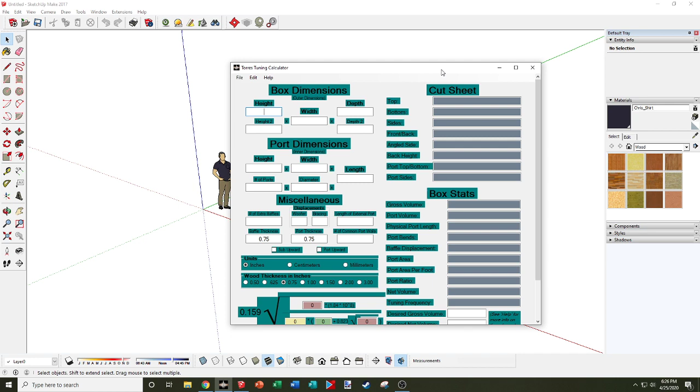It's a Saturday afternoon. We're all in quarantine, I'm sure. Well, I don't know about all of us, but we have a soft quarantine where I'm at. So it's not like we can't go around, but this is the first time I've tried live streaming off my desktop screen. So I'm going to try to do my best here to act like I know what I'm doing, but of course it's our first time.

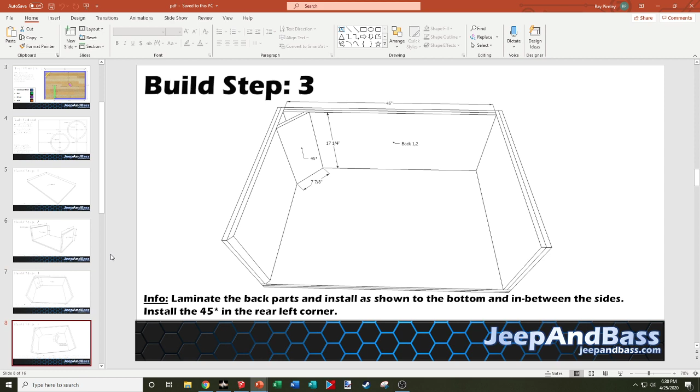and I don't know of anyone else who does that and provides that in their enclosure design services, but step it through and be like, okay, you do this and then this, and I also include sizes, and then there's a cut sheet, for as many as you need, and that's all laid out on here, and then of course I thank you for your order at the end.

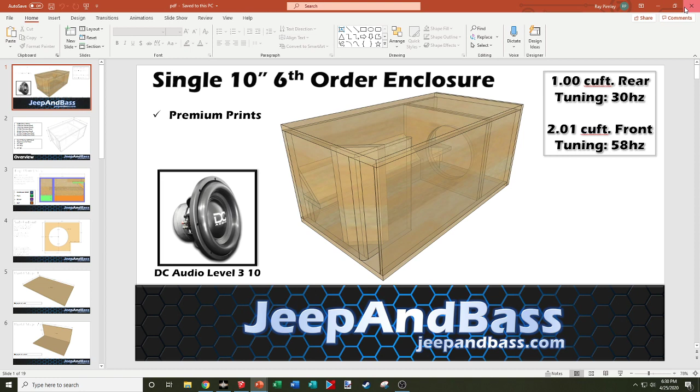And trying to get projects done at the house and all that. But so that's something that you could get as an end product of kind of what I work with here. I primarily stick with ported enclosures because I'm very familiar with them and I've played with them a lot, and I don't use any fancy software.

I'm using this Torres tuning calculator. I've been using this for years, and I find it to be pretty dang accurate for everything I've done. I don't have a download link, but I could get that included later on. Or if you guys Googled it, I'm sure you could find it. But it's a nice little piece of software. It's free. And the next thing I like to use is Trimble SketchUp.

So it's a 3D modeling software. It's also free if you can find that version online. It's kind of tricky. They made it a little harder to find these bits of software, I found, but eventually if you do enough searching you'll end up coming across it and you can get the download, and it works on Windows and everything. So yeah, between those two bits of software I design pretty much everything that I do, and it works. You guys have seen it work.

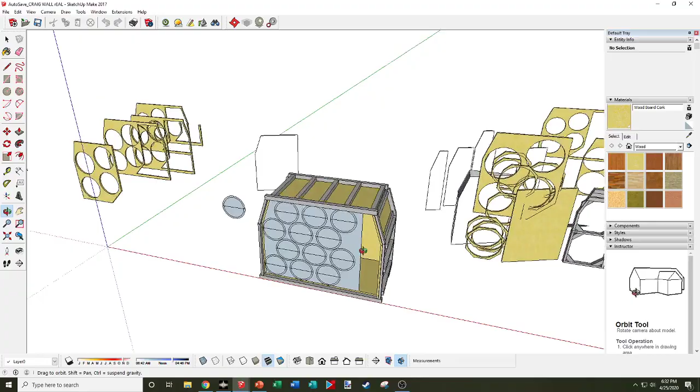So Craig Jacobson wants a wall for 12s. Well, you're just in luck, because that is what I'm doing. So you guys should be excited because the Astrovan is going through changes, and Craig is here watching with us. But this is the model that I put together, and it's very messy right now because we do lots of testing. This is for the Astrovan. This is the 18s build, and this is how I have it modeled. So this is basically the steel cage and enclosure.

And we went through last season really struggling with equipment failure and just the learning curve of building such a high-end SPL system. And with all the things happening in the world and the changes DB Drag, the competition organization, are making, we decided we're not really as into chasing numbers as we originally wanted to be. We got it up to 168s. It's pretty loud, but we wanted to break a 170, and financially and time-wise, it just didn't want to happen. So we're changing our route to something more fun, I think you guys would probably enjoy more on the channel: an actual demo build.

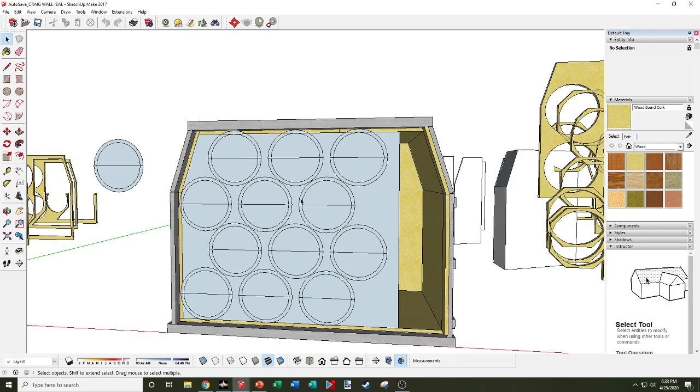So this is something I'm putting together for Craig, and I got to do a lot of brainstorming on making this work, but what we're looking at is our enclosure for the 18s being converted into 12s. So that's kind of a preliminary layout of how I'd put it together. And then these are all our other pieces I was designing for the 18s. And this would be the steel baffle right here that I welded up, and we fit everything to. But that's all going away.

Craig's already been cutting it out, and it's a pain because we, of course, have to cut through metal and everything. But hopefully you guys think that's cool. This is the first time I mentioned it to anyone on YouTube, so congratulations. You saw a sneak peek of what's going to happen throughout the year.

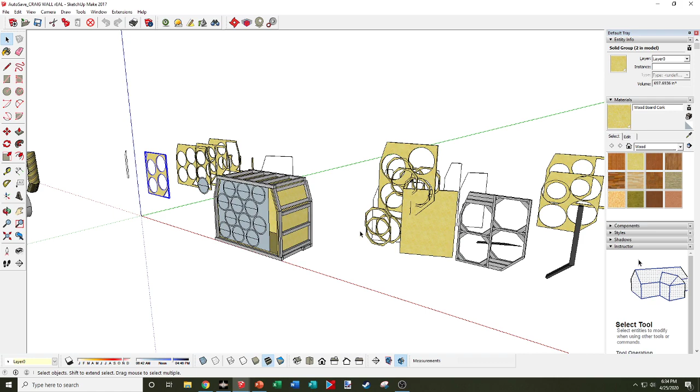But so yeah, this is the software. You can do a lot of stuff with it. A lot of these things, if I'm building this wall, for example, I have access to a CNC machine with Gately Audio. So Bobby Gately in Sacramento, California, he will cut a lot of this stuff for me. So a lot of these baffles we had cut for the van, and what I'll do is I'll design it in Trimble SketchUp, and then I will take all that design, convert it to a two-dimensional design in AutoCAD,

which is software I use for my work and everything. So I have access to Civil 3D and AutoCAD. That software essentially is what the CNC can use to make its cuts and cut our parts out in the real world. So that's that process. But enough of that. Just figured I'd show you guys that. Let's look at something from scratch.

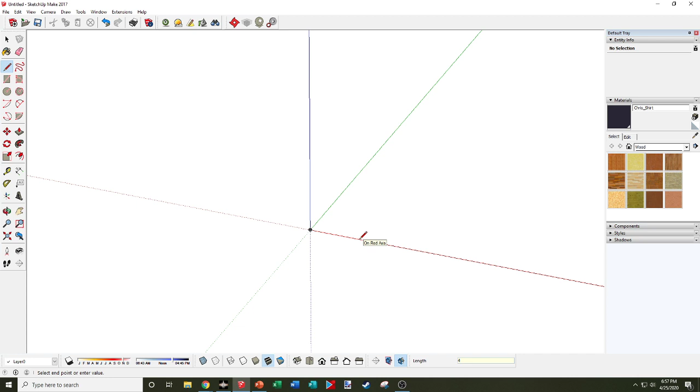Okay. All right. So, you guys probably saw the numbers already, so I'm just going to put it on the other screen and go from there. But I basically start out with the bottom of the enclosure. I know my design is going to be 42 inches wide and 24 inches deep. Okay, so this is my first piece of my bottom of the box, and I'm not going to really give you guys a tutorial on how to use this modeling software. You just follow along, and if you want to play with it, you can download it and learn on your own, but I'll just tell you what I'm doing.

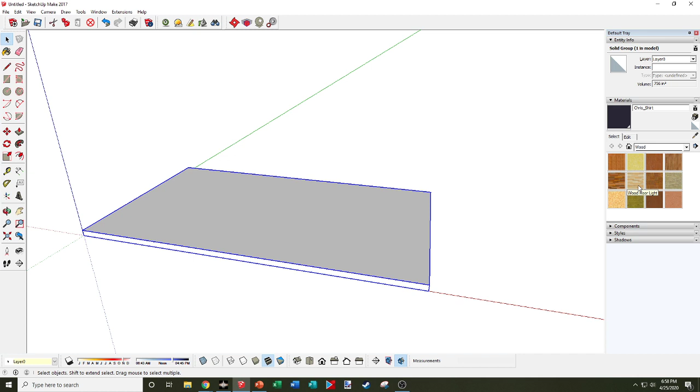So basically I created a 2D surface, and then I made it into a 3D object, and then I'll group it to make a group. So now it's one piece, and the software is not going to get confused and think it's a part of something else. So you can view this as a piece of wood, right? And I can even make it look like a piece of wood. This is my bottom piece of my enclosure, and like I said, I'm going to double up the enclosure to make it 1.5 inches thick all the way around.

So these are my bottom pieces, and if you get a design from me, build step 1 is usually to laminate your two pieces together, usually using your screws and glue. And then we're going to go up from there. So I know my overall height of the box is going to be 20 inches, so I'll draw from the bottom, go up 20 inches, and then I'm going to duplicate these pieces because they'll be the same on the top. And I'm going to place them at the 20-inch mark. So now I got my top and bottom of the box, and now I can draw my sides. So I'm going to do the same thickness, so it'll be 3/4 of an inch.

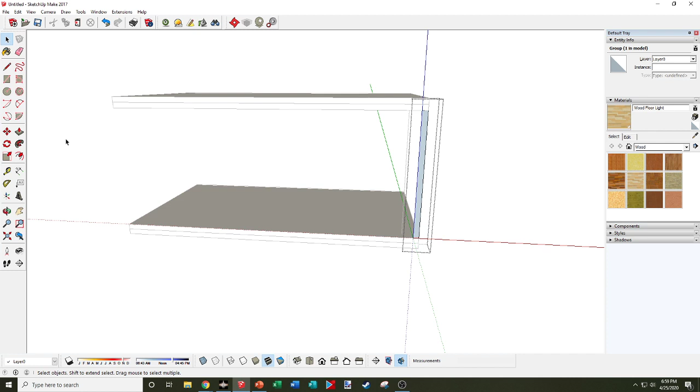And then actually give it some depth here. So there's your side. I'll make it look like wood. And then I can copy it. We're going to copy it so I can double up my side here. And then we'll give it a left side. Alright, so now we have 4 sides to our enclosure, and this is a good start.

At this point, usually I'll take my top and I'll put it somewhere else for now, so I can kind of look down into the box. We're going to draw the back.

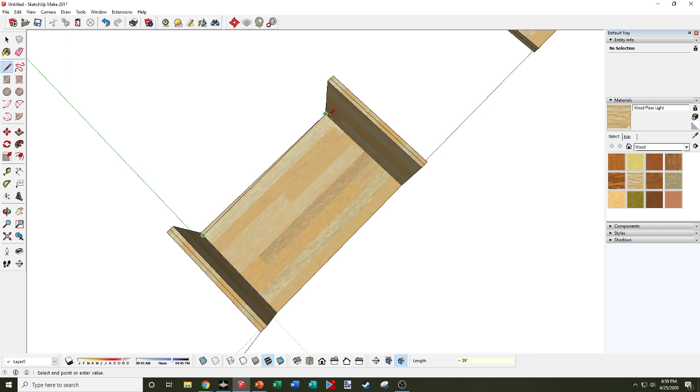And again, guys, I'm not paying attention to your comments at the moment. I'm just kind of going through this quickly so we can get our ideas across, and then towards the end I'll try to get through the comments and hopefully answer what I can.

But so we'll double this up, and there we go. And then I'll just copy these two and make them my front now as well. So there we go. We have all the sides to our enclosure, and right now it's just an empty box, which is fine. And that's kind of what that initial net volume was on Torres when we were looking at it before I added any port or speaker displacement.

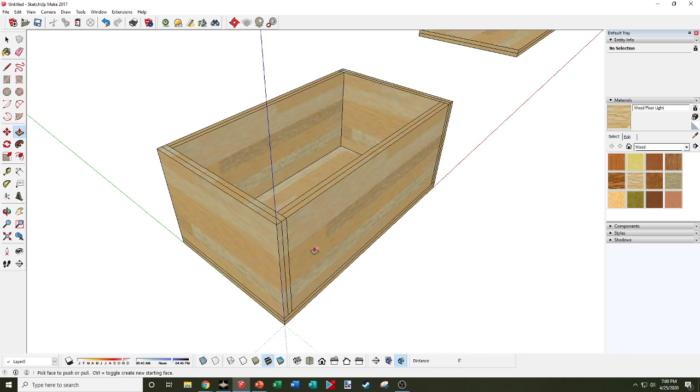So now we got to actually get our port figured out. And if we remember back to here, I said it was 16 inches tall and 5 3/4 wide. So what I mean about how it shares faces with the box was, so this segment is 17. Am I too tall? Oh, I think I forgot something in my design here. So you guys remember I changed the height of my design. I forgot to update the height of my port. So I'm actually going to bring that up and then adjust my width, kind of bring it back.

Let's see. I don't know. That's close enough. So this is kind of that iteration again. If you change your box height and you want your port to be a part of that box height, then you got to change your port height, which means you got to change your port width so that you can get back to that tuning you were going for. So now we're at like a pretty nice rounded off 34 hertz. So we are 17 inches tall and 5.5 wide.

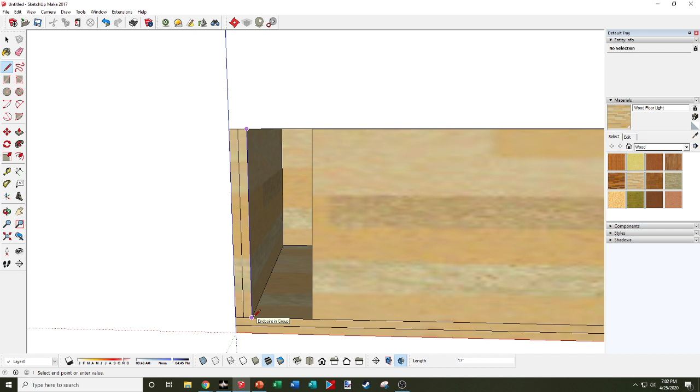And I'll show you really quick visually how that goes. So if I move this 5.5 inches, now you guys can start seeing that's starting to look like a ported enclosure. So this dimension here to the bottom is 17 inches tall. So that's my height of my port, and then obviously my width is 5.5 like I just did. And if we plop our top pieces back on, we have a ported box, sort of, with no depth to the port. But you can see what I was talking about earlier when I was in Torres.

You got to tell it these things, but this number is very important because it's not going to know how to calculate the port without knowing this number. The number of common port walls. I talked about it earlier. That's the number of walls that the port can share with the enclosure. And if you look here, it's 3 because you see this bottom is a part of this port, this side is a part of this port, and this top is a part of the port.

Let's see, if I take this off, you know that obviously the fourth side of the port, this right side, is going to be a piece that kind of sticks into the box. That is not a part of the sides of the box, so it can't be counted as a shared piece of the port in the box. If you were to put the port out in the middle, just like cut a hole out of the middle of the box, then it technically shares no sides.

So then you would make that number 0, and you can see it drastically changes the tuning by like over 2 hertz because now it's basically saying, okay, if I have a port right in the middle, I can't share the sides of the box, which means I have to create 4 sides of a port. If I create 4 sides of a port, I'm actually making more displacement in my box because that's more wood I have to put in the box to actually build a port.

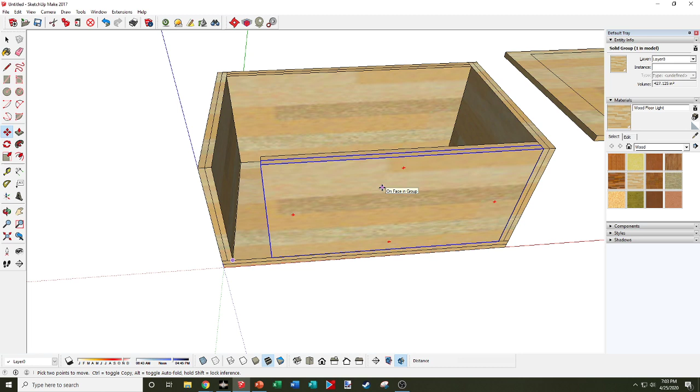So these side ports are really the most efficient use of space, aside from aero ports, because the aero ports aren't going to use a lot of material because they're round and their thickness doesn't take up so much room. So you have to account for the actual pieces of wood. So let's draw this in so you guys get the better visual.

So I'm going to draw the port, and I'm pretty sure it will end up being an L port. So I usually just draw an L, and I start with the first piece as the piece that heads back. And I made sure that this port width going across the outside, this 5.5 inches, is maintained throughout the L. So this section will also be 5.5 inches. So that's why I set it back from the rear of the box. And we'll go ahead and make that a group.

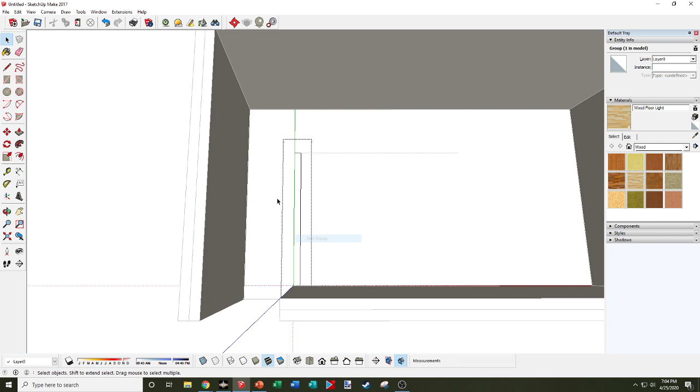And what I like to do is, I know that since this is the L port, I have to turn this corner here. But if you measure this distance near this corner, down here, if you see my cursor circling, that is a dimension that it's measuring out. So if I draw this line, it's going to tell me. Right now it's telling me that's 7 3/4 inches. So that port technically gets wider right here, and that's not what we want.

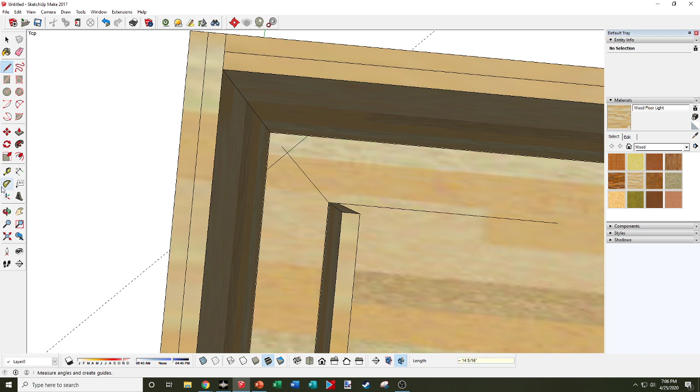So what I like to do is I put a 45 in the box so that the port maintains a pretty consistent width and helps it roll around this corner. So I draw my line into the corner at 5.5 inches long. And I have this fancy tool that lets me rotate things 90 degrees, and then that sets up my 45. So now I know where my 45 is, and I can continue drawing that as a real piece of wood. So I'm going to give it some more dimensions.

Alright, so there's a 45 in our box, and I'm going to make it three-dimensional. Just drag it up here, clean it up. Alright, so now we have a 45 in our corner of our enclosure. So that's pretty sweet. So now I want to use what I have here and find out how much port length I actually have and how much I need to add on, because since I'm doing this L port, I know the port is going to have to go some depth into the box this direction.

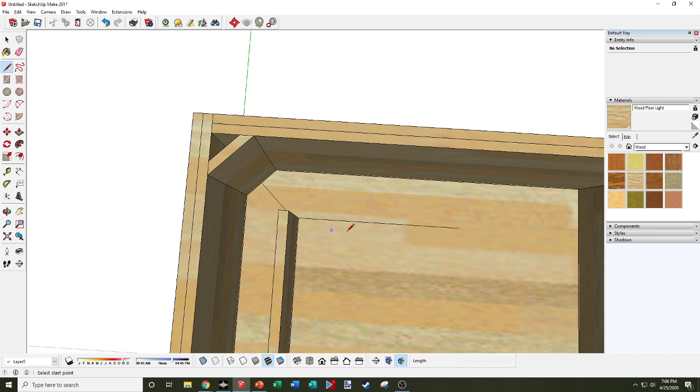So what I do is I'll measure a line down the center of the port, and that's how I determine my port length. And in this 45, I'll shoot some perpendicular lines off, and then I'll draw this line into those. And then down here, I don't know how long this is going to be yet, but I'm going to draw a line and get myself started. And if we clean this up, we now have a path.

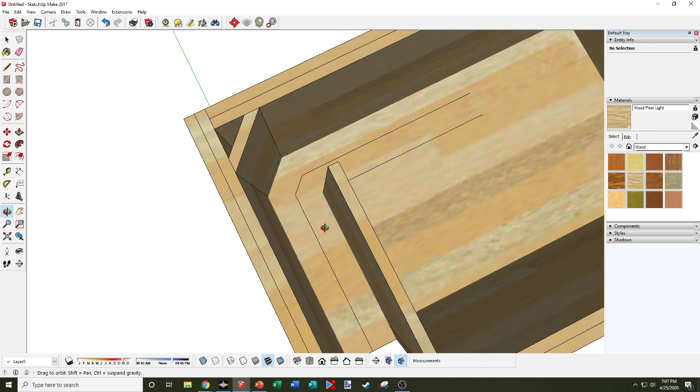You see this line in the center is a path of my port, and I'm going to consider that my port length. If you run down perfectly the middle, you have a pretty average length as you roll through this turn. Geometry gets complicated if you want to go in depth. That's something that you'll have to play with on your own, but generally if you go down the center line of the port, that is the preferred way to measure the port length, in my opinion, and it always turns out good that way. So let's start with this.

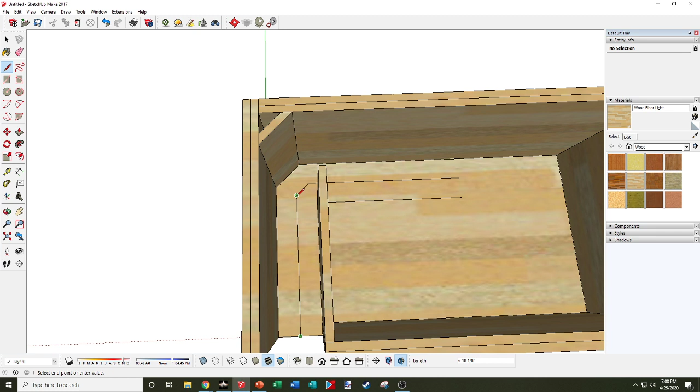Remember guys, looking at this area down here on the screen where my cursor circles, it'll show you the length so you guys can follow along. But I'm going to measure this first segment, and I have a calculator that you guys can't see, so I'm going to do this on my end. But that number is 18 inches plus 1/8 inch. And then I'm going to measure this little segment, and it's 2 1/4 inches. So between those two segments, my port is already going to be just over 20 inches long to this point.

I know I need 26, so from here I take on my calculator 26 less the length I already have measured. It says I need 5.625 inches left to create my full length 26-inch port. So if you draw that line, it finds it right here. And then I know my little L only needs to be this long.

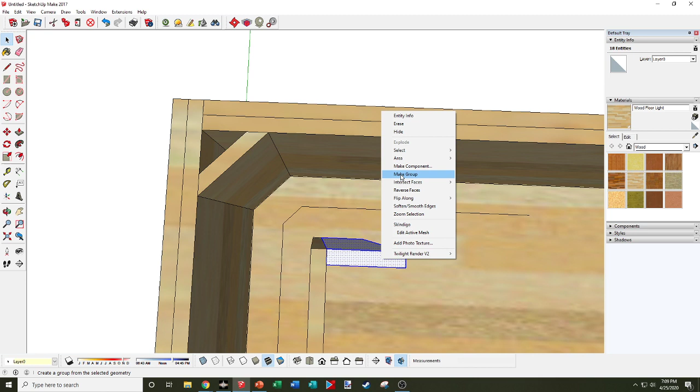Alright. So if I clean this up a little bit for the visual. Alright, so this is my L port, and this line running down the center is now measured at 26 inches long. So now I know that I'm tuned pretty close to accurately, and that could be as far as you guys go into design and feel like it's okay.

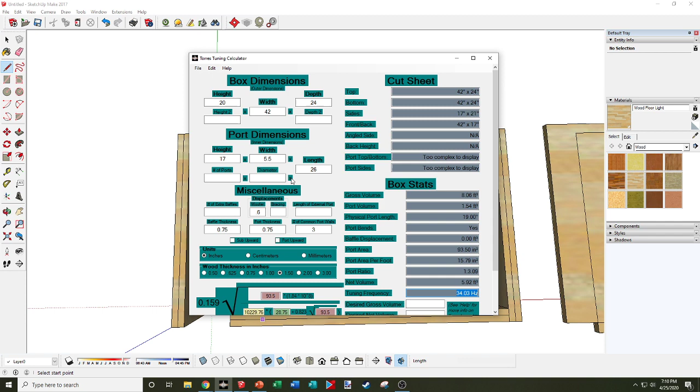That's basically by trusting the software that it exactly calculated this thing correctly. But the nice feature of the software is that you can actually check volumes of things to verify. So what I always like to do is verify what my leftover volume is inside this box, just to double check the software. Torres may have miscalculated. It may have not understood that this was an L port or something was a little off. So what I do is you can draw a line that is the perimeter of the enclosure space on the inside.

So you can see this highlighted area, that's the volume of the enclosure, not of the port. And I like to know how big that is. So you can draw the outline. You'll have this highlighted thing, and you can drag it up a little bit. You have to drag it off the floor of the box, or else it won't understand what you're trying to do. But there's this little label tool here, and you can just click it, and it's going to tell you the square inches of the surface of this.

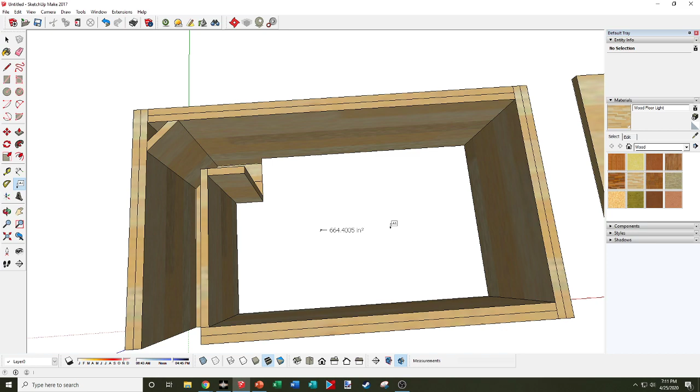You have to raise it off the floor a little bit, as you can see right there, because for some reason it doesn't understand that this piece is separate from this piece, and it'll add in the area of this port, and you don't want to do that. You just want the area of the footprint of the inside of the enclosure. So it's telling me it's 664 square inches. So all I'm going to do is 664.4 times the height of my enclosure on the inside, from my floor up to the top, which is 17 inches. Remember we're talking about the internal volume, so you want to stick with the internal dimensions.

So if you times that by 17, you're going to get a pretty large number, and that's going to be cubic inches. You're going to want to convert cubic inches into cubic feet. So if you take your resulting number and divide it by 1728, you'll have a volume of 6.5 cubic feet. So this entire volume, not including the port, is 6.5 cubic feet. That seems like we're in pretty good shape. But remember, we have to subtract our subwoofers, because they take volume when they go in the box. And I remember we put down 0.6 as our woofer displacement.

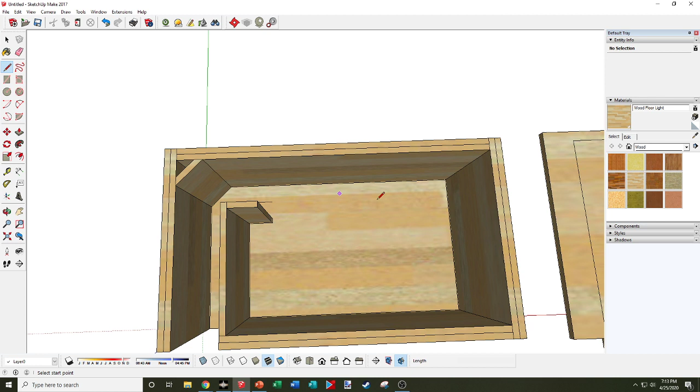So it's going to be 6.53 cubic feet, that's what I just calculated on the software, subtracted by 0.6: 5.93. Wow, we were close. It's 5.92 on Torres. So I think Torres did a good job on this particular design. I've had it in the past where you calculate the volume with the model and it turns out it was a little bit off from Torres, significantly enough that it would impact the tuning of the enclosure.

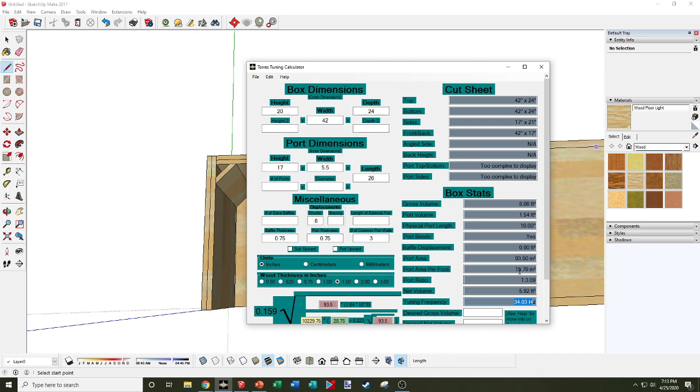From there, I'll leave Torres alone and just pay attention to the goal of the volume and the goal of the tuning and port length. I'll sit here with the model, adjust the walls of the box or change little things, and remeasure the volume of the model to ensure I'm actually matching the volume Torres spit out, because that's the only way you're going to get your tuning, by matching this volume and this port length. So that's how you use the software in tandem. So now we have a nice enclosure, we've verified our subwoofers are going to fit as far as volume goes, and we are tuned correctly.

If you wanted to put a brace in here, that's going to take up volume, so then Torres actually gives you the ability to calculate braces. So if you knew you were putting a brace in, and say the brace took up 0.1 cubic foot, you can type that in for the bracing, and it's going to take that out. And now we see that your tuning's gone up a little bit because you've taken up displacement in the box, and your box volume has gone down, and your port area has gone up, and we're at 16.

So that brace might be okay to put in there, but I might not want it in there because I like the numbers here. It's kind of a lot of trial and error, and you'll play with it.

I'll get some water here.

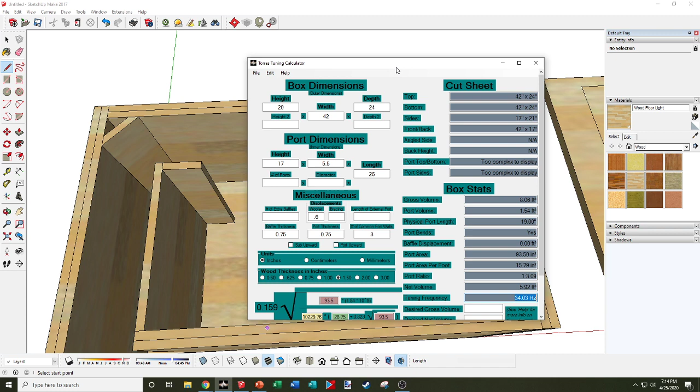Okay. But I'm going to leave this the way it is for this example to keep it simple. This won't be my final product for my Jeep, but it's helping get the point across and do some brainstorming. So we'll put the tops back on, and there we go. We have the enclosure. It's tuned, but now we have to place our speakers. So this will be the next thing I do.

Basically, with this software, I'll just draw a line that's the diameter of the inside of the speaker, so that's the mounting hole diameter, and the outside diameter. And you guys can look up specs on your subwoofer. Usually they'll be provided on the website, but they'll say mounting hole diameter, and for a 12 it's usually 11 inches, and then the outside diameter is 12.5.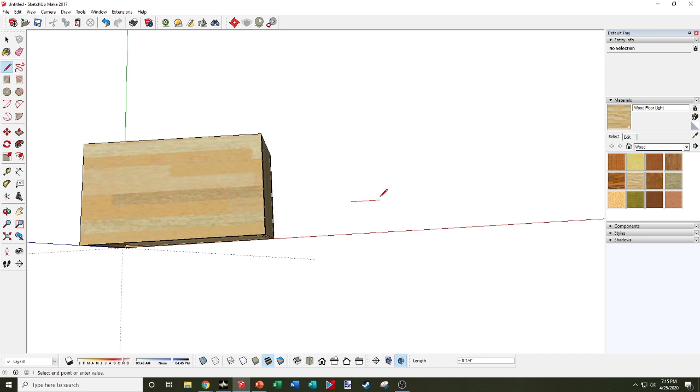So as we all know, the speakers have this flange on them where you put the screws. The cutout of the box is going to be a little smaller, and then the overall is going to be a little bigger, because that flange is going to be larger diameter. So I'll start by drawing one circle. So I'm going to make this line at 11 inches, and then I have a circle.

So that's an 11-inch diameter circle, and then I'll have a 12.5-inch diameter circle over here, and then I just bring them together. And this to me represents my speaker. I'll make it a group. So this is my speaker, and I'm going to plop it on there, and I'm going to make two more because I'll have three speakers.

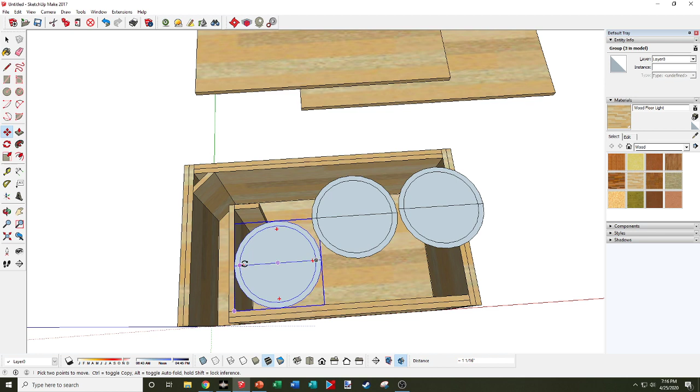And sometimes you'll find out that you physically can't fit your speakers in the way that you have your port set up. So sometimes you have to scrap your design and start over, but I think I can make this work. So I'm going to start by sticking my speakers in a triangle shape. I think that's what I'll end up doing. So they'll kind of go something like that, right?

And maybe you don't like the look of this, then you can change the port. Maybe the port can go across the bottom this time, and then you could center the speakers more in the box overall. So many different ways to do that. And the more you play with it, the better you'll get. So this is why I do these designs sometimes, because people don't want to think about this stuff, or they're not comfortable, and they'll leave it to me. And I'm used to doing this stuff, so I usually figure out a pretty good solution.

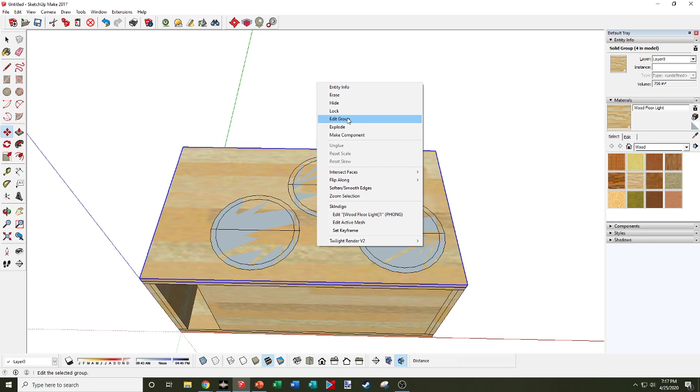So I'm gonna just go with that layout. I didn't perfectly measure where they go, but just for the tutorial, we'll say that they're perfectly placed. So now I'm gonna edit my piece of wood on the top and actually transfer my layout down into it. And again, you're gonna have to learn how to play with the software to do this. And then I can get rid of my little speaker things. And there we go, we got our first set of cutouts.

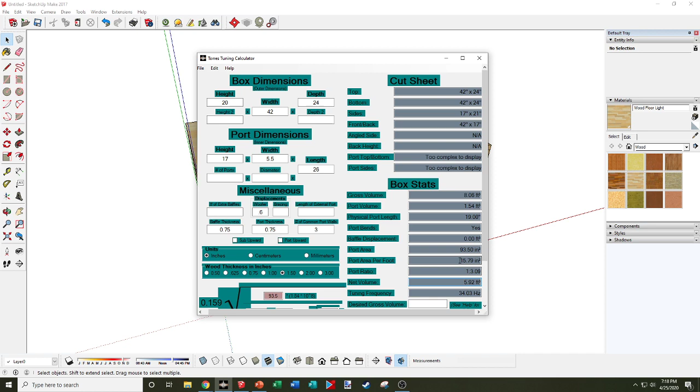And then I can actually just copy that down. That's my double layer baffle. So boom. There we go. And now we have our holes cut out in the model, and it looks awesome. So this is our design right here. And we've already checked that everything works with Torres, so we know that our tuning is going to be at 34 Hertz. We have the appropriate amount of volume, and our port is doing what it's supposed to. And that's essentially the design at that point. There's other things I'll end up doing usually, so we'll go a little more detail.

But you know, this will get you going. Things I'd like to do, because I'm funny, and this will take up volume. So in my example, I might not be able to get away with as much of these kind of cosmetic things, but we'll have to keep account of the volumes that are being used.

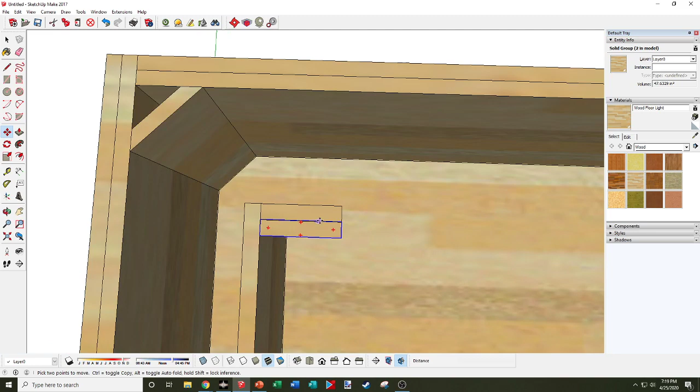But I'm going to actually double this up right here on this L. That's what I like to do for most people's builds, because I like to put a nice round over on the end of these. Sometimes the software doesn't know what you're trying to do, so you have to kind of help it out. But this is if you took your router and you put a round over on it. So there you go, you have a round over.

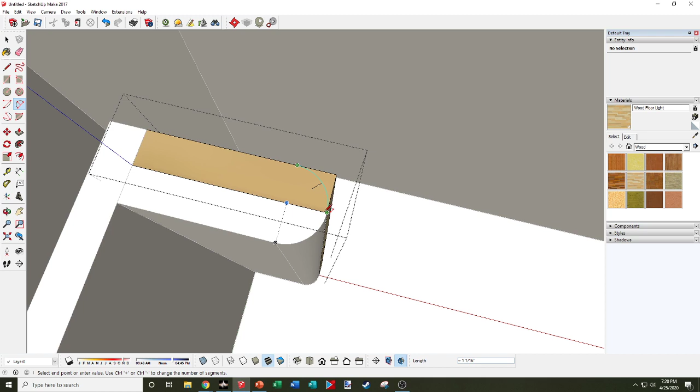And then I would do the same thing on this side. Right. I don't think I drew it right. Sometimes you have to help software, so you have to draw a line out and then it knows what to connect to. There. Alright, so that would be the end of your port. It's a nice clean round over, that way air is getting around it nicely, and then maybe you'd put one on the inside of this to kind of clean it up. So I'll do one of those.

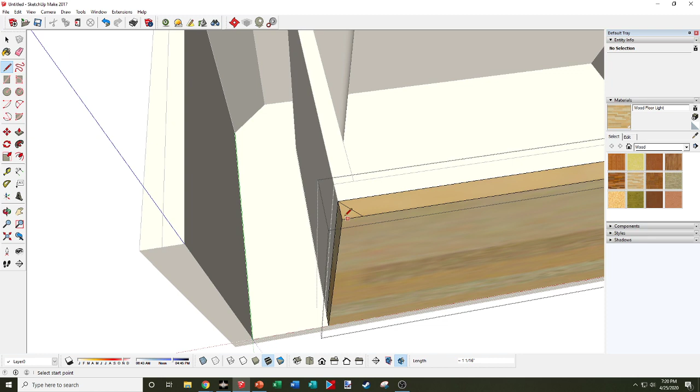And there you go. You got a nice smooth flowing port going through there, and then maybe on the front you want to do a round over, or maybe you want to do like a 45. 45s are usually okay. Something cosmetic, or however you like your box to look. I like the look of these 45s cut in here. So then you could do that.

So there would be your port opening, and now you can put your box back together, and you can call it a done design. And then I would usually double check all my work, and then I would put together the plans for someone and send it off to them in a PDF. You can do this cool thing with shadows and make it look nice for a cosmetic photo or something to send to someone or to look at.

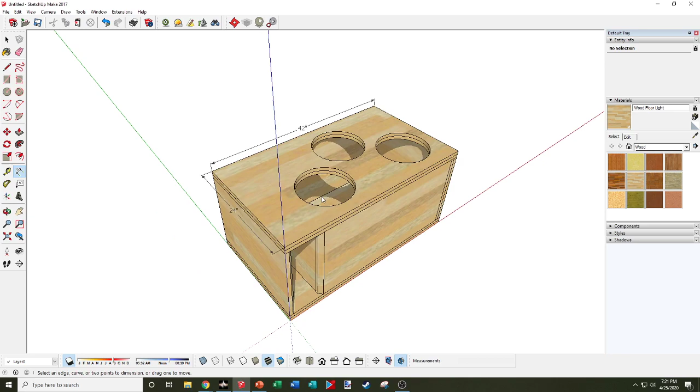But there would be your box, and then you can look at the measurements and see how big it is by measuring this stuff out. So that would be your speaker enclosure, and we just designed that in probably an hour. I'm a little faster when I'm able to think and not have to speak. And it works out and it matches this. And people are going to be like, well, I want to see a graph, or how's this thing going to perform?

And that's a lot of the stuff that comes with experience. Honestly, I don't trust any of those softwares like BassBox Pro to tell you a bandwidth. It's not ever going to be accurate to the real world. For me, it's been trial and error for a lot of years, and just knowing this is my goal in my head. I realize that a ported enclosure is not going to have crazy bandwidth the same as a sixth order or maybe a fourth order. It's going to act different, but I understand that. I understand what I want.

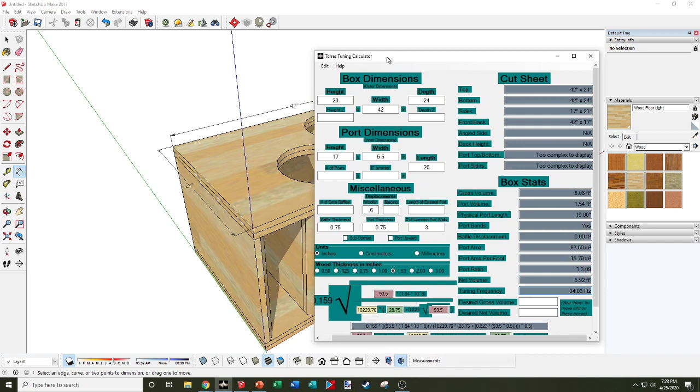I want it to be pretty loud. I don't need super crazy lows, so I'm not worried about tuning it into the dirt. I'll tune it at 34 hertz, and it will play probably safely down to like 25 to 28 hertz, depending on the vehicle or the subwoofer. The subs that I'm using are the ones out of my old build, and they naturally play stupid low, and they love it. So if I tune this thing at 34 hertz, I know those subs are going to be happy, and they're going to carry down to 25 hertz pretty well, even in this box, and be able to play significantly above that.

Usually the rule of thumb to gauge roughly what your bandwidth should be is the box will play pretty safely about a half octave to an octave lower than your tuning, and it'll play pretty safely an octave or even two above what you've tuned. And an octave, I guess you could say, is like halving this number.

So like 34 divided by 2 would be, that dictates it plays down to 17 hertz, which is way lower than it would. So it's probably about a half octave is realistic. So 34 divided by, let's see, I guess that's 1.5. I'm trying to remember this rule because it seemed pretty realistic, but I think just kind of based on what I know, I think this should definitely play down to about 25 hertz, considering my subs. And if it plays an octave above, that's going to be 34 times 2.

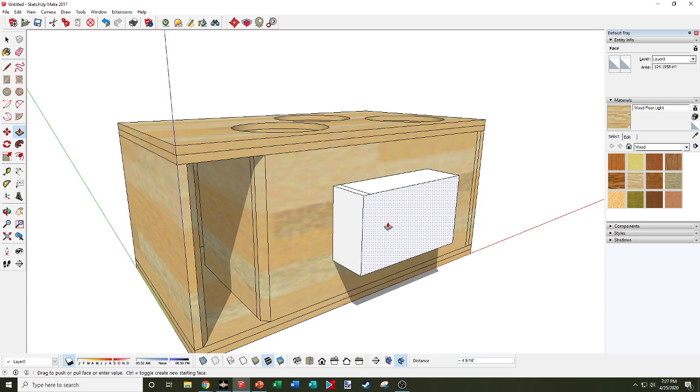So I'll tell it it's going to be 5 inches on the outside. So it'll actually pull the port out. So if you had a port going through your firewall, and then the rest was actually coming into the box, it will know how to take that volume out. But the tricky part is when you're doing that and coupling chambers, you end up having to do a lot more checking of volumes, because that's when Torres will start having issues keeping good track of your volumes the more complex of a design you do.

So a lot of this stuff is you got to do your own bookkeeping and keep track of your design, and purely think of Torres as a way to get you to the ballpark. And if you really want to fine tune stuff, you pay attention to the numbers it's putting out. Like if you want this thing at exactly 37 hertz, you need to figure out how to get your design to be exactly 6.45 cubic foot at this port area with that port length. And it'll all work out in the end, but it does take a lot of patience. So again, people will come to me and just have me do it because I can do that. I'm used to doing that.

So I've been doing more designs lately because I've had time at home and been able to do that. But if you want to try this stuff on your own, then it's a lot of trial and error and practice. But definitely brush up on geometry and some basic math skills. If that's stuff that you don't do every day, those are good things to know. Just understand what volume is, understand what square inch area is, understand how geometry works.

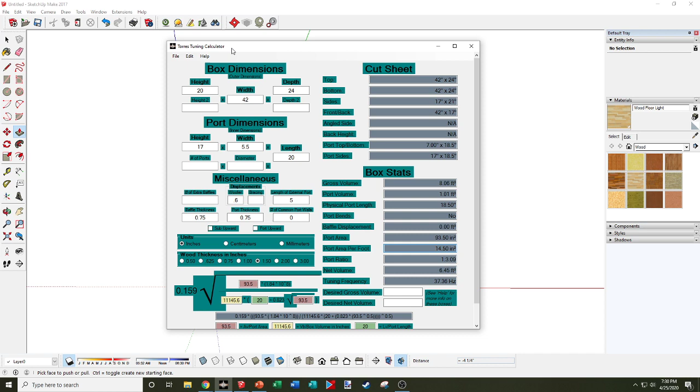I've gotten emails from you guys before from other designers, asking me if I could look at the work and see if there's something I can improve. And I've seen some weird stuff that I don't think I would do, and I never want to bash on other designers, but there's stuff that I don't understand, and it seems like you guys would pay a bunch of money to someone and you don't get a very nice product out of it. They'll give you a cut sheet and some dimensions and call it good, and they send you a couple of pictures.

I'm not into that. I feel like giving you guys the full service is the best way, because not only do you need to know that your box is tuned right or if it's the right size or everything's going to actually fit, but you need to know how to build it, in my opinion. So that's why I do these step by step. I'll show you like, hey, this piece will go on next. It's got to have this cut in it. You probably want to do that cut before you put it on the box, blah, blah, blah.

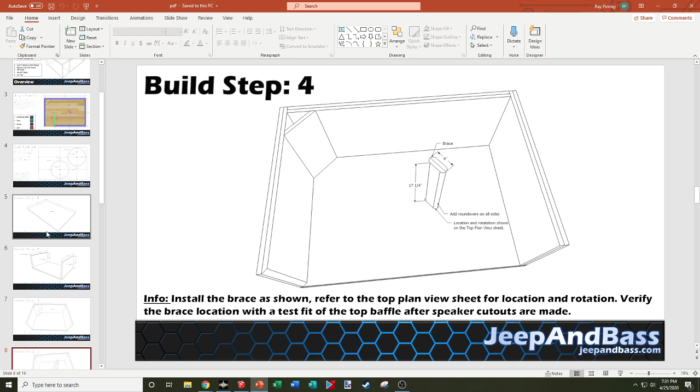For every example, you'll get the detailed specs. And that's what I like to include in my plans. I'll even tell you where this brace goes. I'll tell you all kind of things about it. So you can kind of see that there's the next level of detail that I try to provide to people if they come to me for an enclosure design.

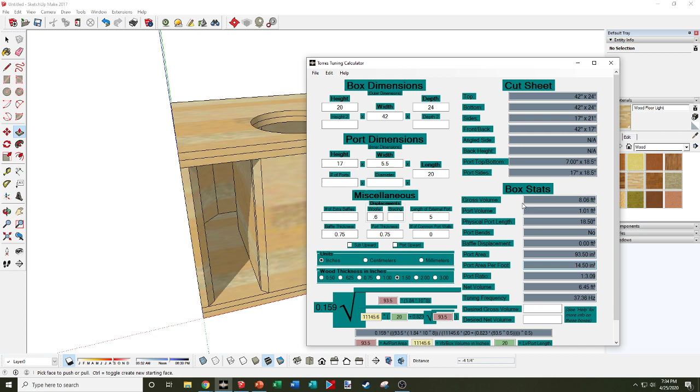So yeah, you can design band passes on here. You just have to do a lot more tracking and footwork with what you're doing on the numbers, because this software will not spit out a fourth order or sixth order for you. It just doesn't. It only knows how to do ported enclosures. So if you're doing band passes, you kind of have to treat it as a ported enclosure and then couple it with another enclosure on your own. But it's something for you guys to play with if you want to do that.

So you guys like the box? Someone says amazing. So yeah, if you guys didn't catch this earlier, this is going to be for my Jeep. I am going back to just a regular, not wall setup. I have a lot of reasons. I can go over that in another video. I don't want to bring people down or make them feel sad. I don't know if I'm moving on from doing that or if I just want to preserve my Jeep. But in the future, we'll be doing more builds on the channel, like big walls.

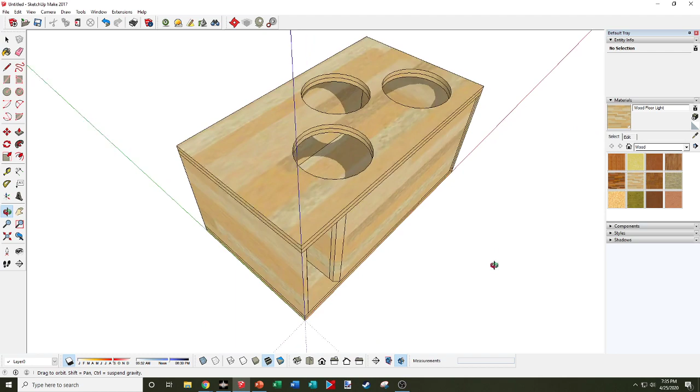I think the Jeep wants to retire for the most part, and trust me, there's going to be a nice build video for the Jeep, and it's going to have an enclosure pretty much like this one. This is my first iteration of a design, and I'll keep playing with it. So it should be fun for me to do a build in the Jeep that is more on the level of what you guys might be doing in your personal builds. Not everyone on my channel is building walls. Not everyone's even doing 312s. There's guys with 112 on one little amp. I'm doing 312s on 15,000 watts, and I'm trying to convince myself that's a small build. I guess it's not, but hopefully it's more in line with what you guys would like to see as a learning experience for your own personal builds.

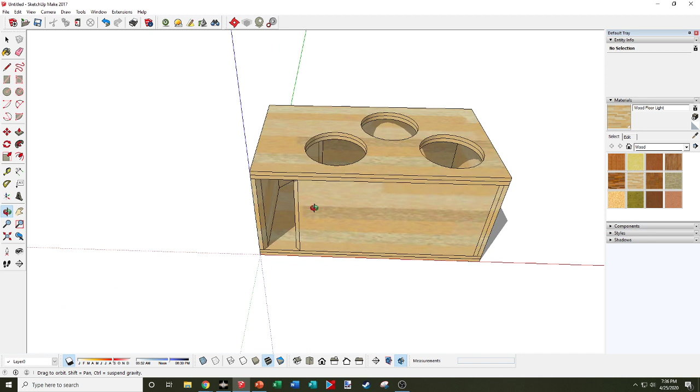So that's kind of where I'm going with the Jeep, and I want to restore the Jeep and have some fun with it again. I used to take it off road and do a lot of fun stuff like camping, and I think that's what I'm going to do with it. And we're gonna rebuild Craig's van a little bit into a demo monster. So there's going to be a huge wall build coming on the channel, so don't worry. But again, I'll post an official video and we'll go over that.

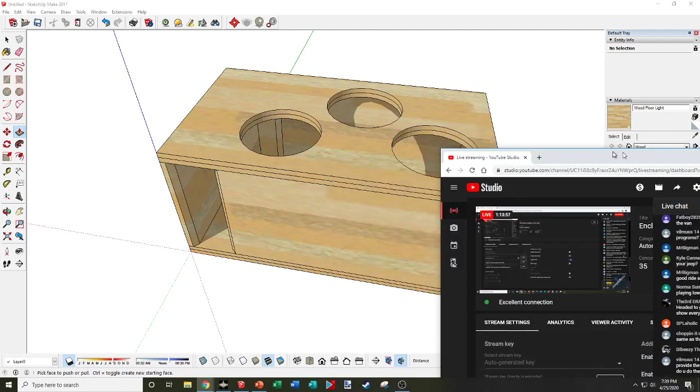And there's some cool videos online. There's this dude in Australia, I forget his name. He's got a YouTube channel. I think he's doing a lot of amp repairs now and stuff. You guys probably follow him. But he had a video showing subwoofer frequency versus port tuning, and how those things interact with each other. And he used this scenario of a weight on a string, and you swing it back

and forth. And he was showing how his hand motions in relation to the string were kind of like the FS of the sub versus the port tuning, and you could get the little weight to swing back and forth at the same rate as your hand, or you could speed up your hand, and then the weight is kind of trying to trail behind your hand. He did all these really great examples, and it really well explains how that all works.

So you guys might know who I'm talking about. Yeah, Bear Vids. Guys, go look him up, there's a video, and it's a really, really way better explanation than I could ever give you on how the port interacts with the subwoofer.

So I want to keep going with the comments. Thanks guys for chiming in on that. "Your port height is wrong now." I know. I was playing with Torres for some other example. I don't know when I changed it. I think it's still right. It doesn't matter because I finished this design and I was playing with Torres for some other questions. So I'm gonna keep going.

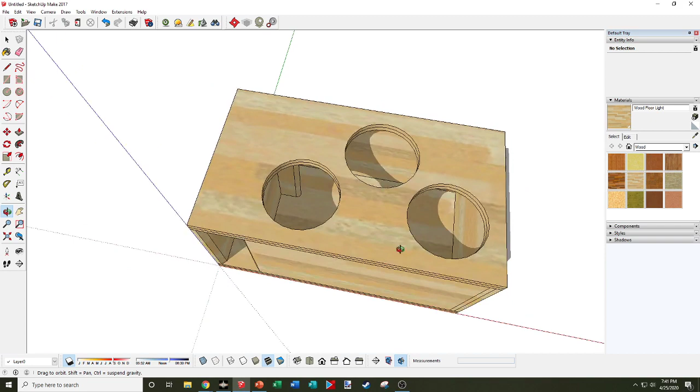"Is this for your new enclosure?" Yeah, I think we answered that. For the new build in the Jeep, I'm doing the JVF 12s for right now, and I'm pretty sure they're not gonna like the amount of power I have to throw at them. So we'll eventually do a Level 5 DC. So yeah, some Level 5s in here. Maybe put them inverted or something. We'll play with it. Something fun for the channel.

We can go over inverted subs versus non-inverted subs, but a good example of that right here on Torres calculator is, you notice I have the subwoofer volume taken out of the box, and we're tuned. If I fix this, I think that's what I just had. Yeah. So say my box is tuned at 34 hertz. Well, if I go ahead and invert my subs, I can take this volume out of the box, and now I'm tuned at 32.4 hertz.

Right, so I effectively made my box bigger. The box is now 6.5 cubic foot, but now my port area is a little small, so it could potentially lose some bandwidth, or it could gain. It's hard to say until you try it, but you could definitely say that the tuning has gone down, which means it could potentially play lower.

So when people invert their subs, that's exactly what's happening. You've created volume in the box, therefore the box is now bigger and will play lower as long as nothing else has changed.

So let's keep going with comments. These are probably older ones because I haven't looked for a while. But center port will use 2 walls, top and bottom. Well, yeah, you guys are catching on. So like this port uses 3 walls.

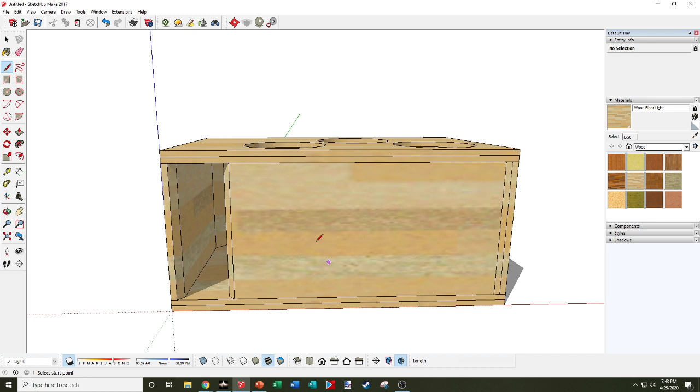If I had a port right in the middle of the box that was from the top to the bottom, then it would only use 2 because it's only using top and bottom. But like I said earlier, if it was like a blow-through style port, then it's using no sides because it's not sharing anything with the box. So that's that. But let's go back.

Oh boy, let's see. Why don't you just raise the cubic inch tool up to 17 inches? Then all you'd have to do is divide the number by 1728. Well, it's because it's not a real cubic inch tool. You guys are gonna have to play with this software, but I'm gonna draw. Let's say I want to know the volume of this little area right here.

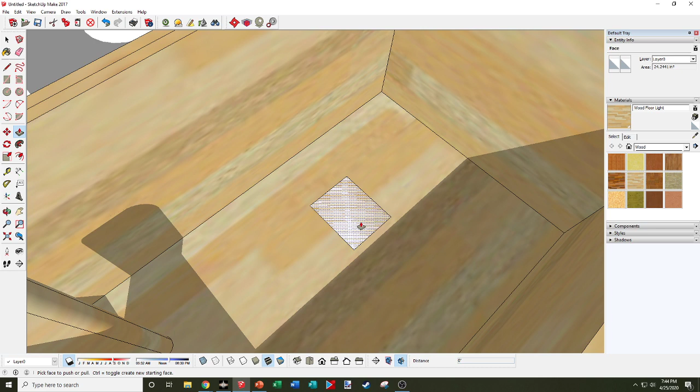I just drew like a 2D face, and it doesn't understand that I'm trying to get the little bitty area of that. So I just drag it up, and then it can get the area of just that top face that isn't this whole bottom of the box. So now it's like a small number, 24 inches. It can't tell me the volume of this square without me manually calculating that based on that little number, because it's only getting the surface area of the top face of the square. It doesn't understand that this is a cube.

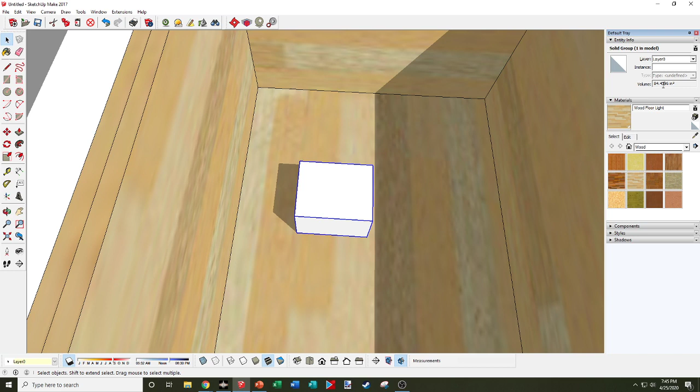The only way the software will understand it's a cube is if you drew a nice cube and you made it a group, then it will tell you up here the volume of that cube in cubic inches. So that's a way to do it. I guess I could do it that way, but that requires that I draw this out perfectly in here and I make it a group. So there's a couple of different ways to go about calculating the area and the volume of a box, right? So you guys will end up having to play with the software if you download it. And I can try to answer questions later on.

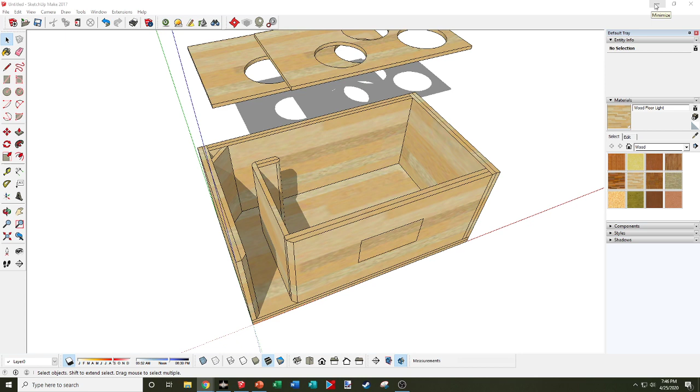But since Craig's doing a big build, we should have the best of both worlds on the channel. And don't worry, I'll end up getting another vehicle in the future that we can do. If you didn't see at the beginning of the live stream, to give you some hope for the world, the Astrovan is being rebuilt a little bit. We're cutting the baffle out, and you guys remember this is my design for the 418s. We are switching this thing out to 1212s, and it's going to be a demo build. So don't worry, guys. There's going to be a big demo wall build on the channel. We'll be having video on that, and I think it'll be a lot more fun than chasing numbers.

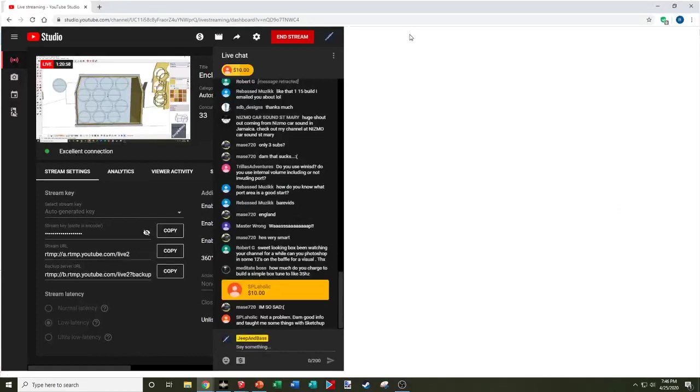That was a tough thing. My goal was breaking a 170, and we broke a 168, but we lost so much equipment, and it was so hard. And the hate online from the community of the dB drag people, and I don't want to compete that much anymore.

I like competing in music classes, and I like competing in MECA and IASCA, but I do not like dB drag anymore, and I don't feel like talking about dB drag. If you guys participate in dB drag, do it for yourself. Don't do it for the title anymore. There's no point, in my opinion.

So Craig and I decided we are switching to a demo build. We're going to put up whatever number it puts up. We hope it does a 165, but actually be musical instead of just a fart box, a burp box, you know, for chasing SPL. The concrete portion of the enclosure obviously is staying. We're not messing with that because that's what that is.

But we're trying to make the Astro van more of like the people's build, and we think that 12s will be awesome, and we can start demoing it for everyone. We're gonna put some crazy door panels in it, and just have tons of mids and highs, and we'll have fun with the vehicle. We have a nice wrap on the van, and we really have fun with the van. But we're gonna do the people's build, I think, with that.

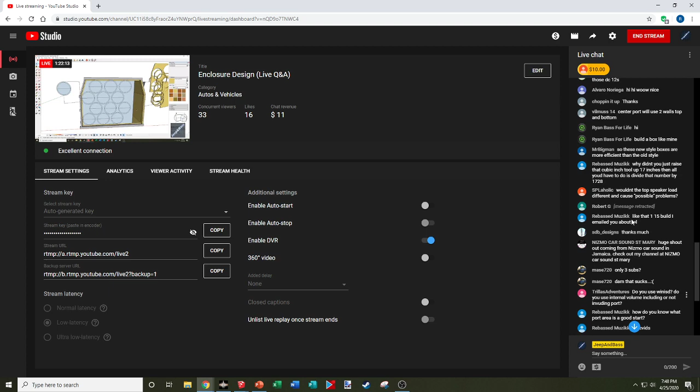So kind of panning back through these questions. Oh man, people in Jamaica. What's up, Jamaica? I hope you're still watching. Thank you, Nizmo Sound. I butchered the name. I'm sorry, but you guys can see in the comments that must be your shop, and hopefully this is a nice shout out for you guys. So if you guys are in Jamaica, there's a shop you can go to.

Alright, so WinISD, do you recommend checking? No, I don't use WinISD. I played with it and I didn't really like it. Again, like BassBox Pro and all those softwares, I don't care what the software tells me what the bandwidth is going to be. You know, they give you the little output in the graph. They want to know all the sub specs. I don't care. Where I'm at in car audio is I have enough background knowledge in my head of what things do.

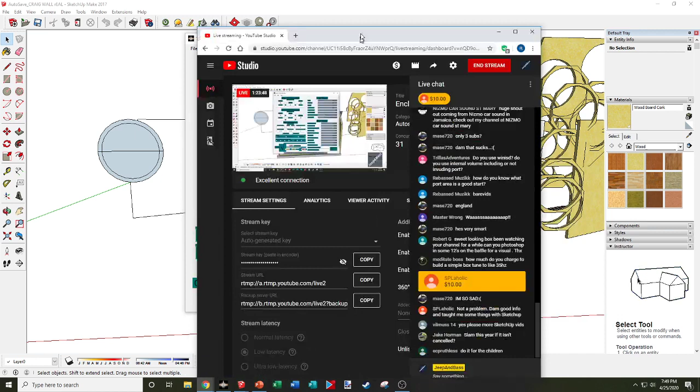So when I set out and I design something on here, I usually think of the vehicle if I know the vehicle. If I don't, then it's kind of a shot in the dark sometimes. But I have a general idea. Like, I know this works in this vehicle. I know that this woofer prefers to do this, and I know how much power I'm going to be using. I'm going to design it based on what I think it's going to do and what my goal is for that design. I don't pay attention to what little graphs are going to tell me because none of that stuff ever works out in the real world. It'll totally change, and I don't mess with it. So anything that outputs the graph, I don't care. That's just where I'm at.

So Robert G says, what's up? Been watching your channel for a while. Can you Photoshop in some 12s in the baffle for visual? Thanks. I could actually Photoshop speakers into these models so you can see them, but it takes time, and so I never usually do. I just show the holes.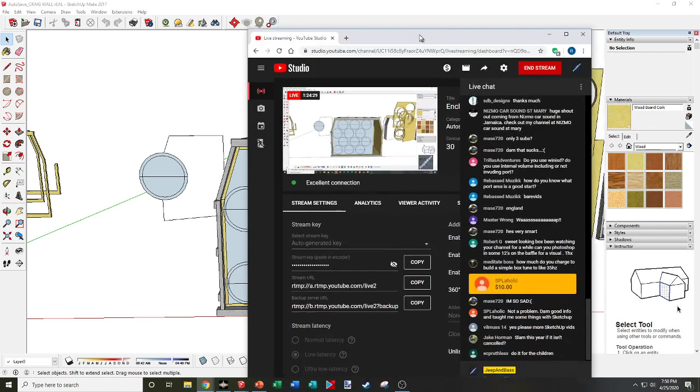If someone specially requested to see the speaker in there, I'd have to charge you for some time because I'd have to actually draw the speaker out. I don't know how hard it would be. I haven't really done that for a long time. I think there's a way you can paste images into the software and you could have the face of the speaker, but I don't ever worry about it. But if you wanted it for a visual, there you go.

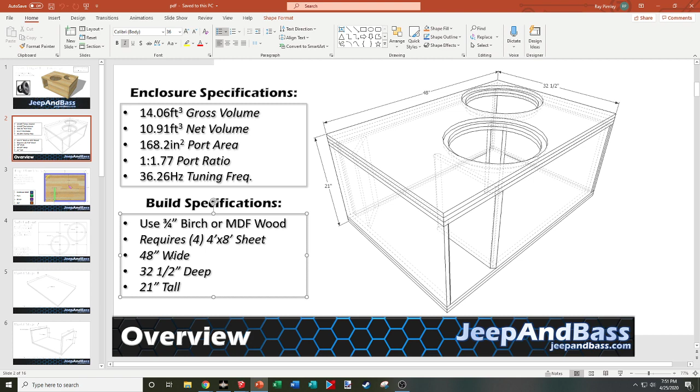You'd be able to say that to people, you know. So that's something I provide, and it seems like 40 is a good value. I've had a lot of people tell me I need to charge more, and I don't know. I charge a lot more when it comes to doing bandpass enclosures, and I usually tell people I don't want to mess with bandpass enclosures because it takes so much more of my time. I'll send it off to someone like SPLaholic or whoever, and there's some good designers out there that do those a lot more. But so yeah, we can do any design.

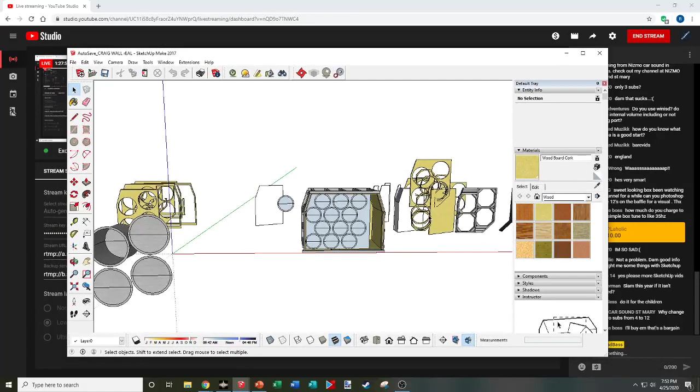What I was saying about the DB drag is, we were one of few people on the West Coast that was trying to get competitive, and we just get shit on all the time. They don't respect us out here, and I guess because we're a bunch of crybabies for the most part, we always complain about the rules and things with DB drag. And the East Coast guys, man, they run the show down there. You probably see them on Facebook. I don't know if you guys know those guys at Soundcheck Customs, but they got the world record for the loudest no wall build right now.

They bought the imported vehicle. They got access to a shop space and everything, and that's the way to win. That's how they win that, and I have a lot of respect. I tried to take a stab at going for a championship a few times, and I've come in second place at World Finals a few times. And the last 5 years, things have really gotten louder, and these guys are putting more time, more money, and more everything. And out here, we don't have those kind of teams. We don't have those kind of resources because we're not as close to those companies that supply the products and everything. So we have a hard time.

And I think the mentality is different on the West Coast because I'm in California, and trust me, I do not like California, but it's how it is out here. We're more like, we want to have a good time, we want to do our thing, and we just don't build for world championships that way. We don't have the resources or the time or the skill, I guess, because all the knowledge is in those guys that have teams, and they bounce a lot of ideas off each other. So I don't even know what I'm talking about right now. I'm just saying that we're going to a demo build in the van. But we'll look at some of the last comments.

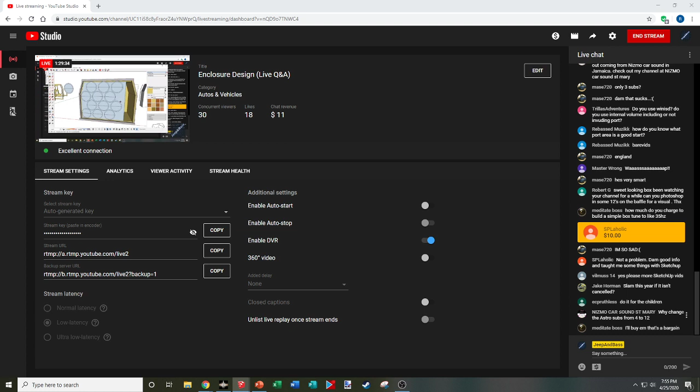Looks like, why are we changing the Astro? I guess I answered that. We're done doing SPL chasing. It could have been fun, but the sportsmanship isn't there anymore.

We had a bad time at finals, so World Finals with the van. We lost 3 subs, and it put up a 165. And the class was a 170 plus class. So if you're not doing 170 decibels, then they don't care about you. And because we lost 3 subs and only put up that score, we got so much criticism from people.

And I don't know why. We never called anyone out. We never said we were trying to beat anybody. We were just trying to reach a personal goal of 170 decibels with the 4 subwoofers. So this is like the baffle from that. And

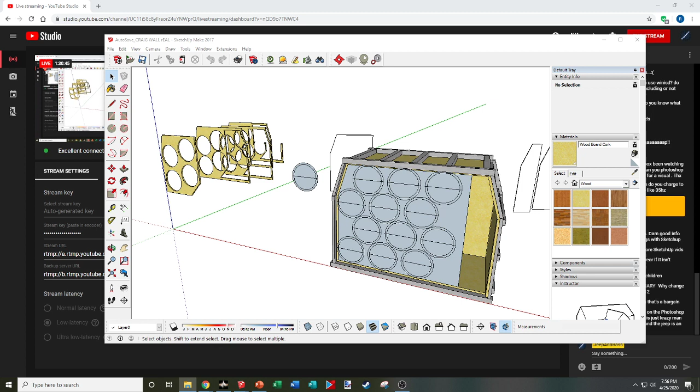We had bad luck at finals. We had a lot of bad luck that whole week, and just trying to get the van there and getting it set up. And then they just shit on us. They didn't even say good try. They were just like, haha, you guys are losers, and they keep rubbing it in.

And I said, I don't play that. I don't get into stuff like that. I don't care anymore about trying to win against people that aren't worthy of even competing themselves. So we are going to have fun with the van, and let's see if I can find. Do we have any good photos of the van?

'Cause you guys have seen the van, I'm sure, but I don't even know where I would keep any of that stuff. But you guys know what the van looks like. Gosh, I don't know where I have photos of the van. So this is like where I keep all my videos that I work on for you guys. I don't think I have any van stuff in here anymore.

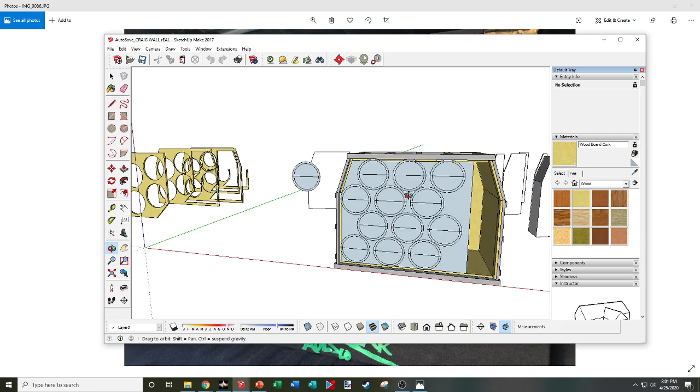There's not any real good choke builds out here on the West Coast. I've sat in a few that have come from other areas where they just kill you. Like you get in there and it makes your nose bleed. Those are rare out here for some reason, and everyone wants to play lows. I'm like, man, I want some of them. I want to knock my wind out too, to where I can't breathe.

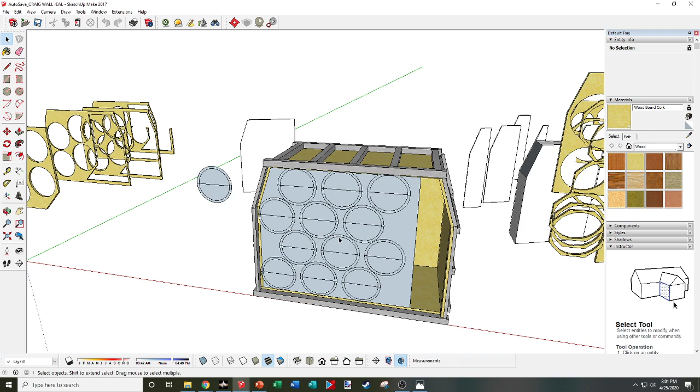And we actually did demo the 418s a little bit in Vegas. We had a good day with them, and I don't know why, we just couldn't blow them up, and we just kept playing it for people, and that was a lot of fun. And we realized that's a lot more fun than rolling up in the lane for 5 minutes and making a noise and then being done for the day. Oh, I got a trophy. Well, you could still get a trophy and have a lot more fun. So that's what we're gonna do.

It's gonna be awesome. So I guess I keep repeating myself. I do that a lot. I keep talking about the same things, but I'm just trying to get your questions out. Yeah. So no sportsmanship. Yep.

That's where it's at. When I was young, when I started the competitions, I used to be kind of a braggart. I would say stuff and challenge people and I would win a lot because I was into this and I could get trophies. And anymore, I've grown up a little bit and realized that's not what it's about. Winning's great, but you gotta be happy for other people winning too, and for people reaching their goals and having some success, even if it's not getting first place.

You can't just go out and be like, well, you had a bad day, so you're a loser, so I have no respect for you. You can't say that to people. That's not how this works. If you have a competitor you've gone against and you won that day, well, you had a good day, and maybe you're the better competitor, but the real sportsman will let the other guy know, hey, you had a good run, I see potential in your build, you'll get me next time potentially, and if you need help, I got it.

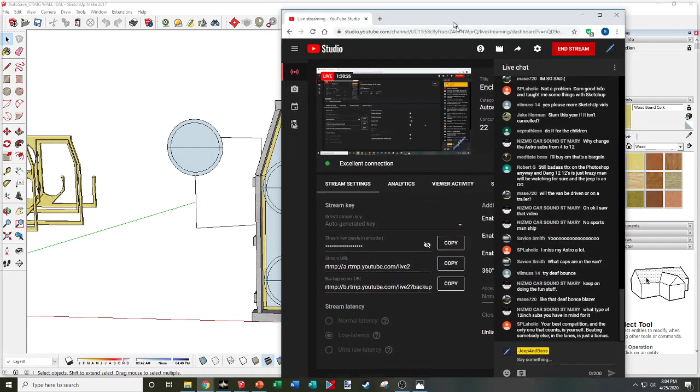Then he came at another show and wanted to do a grudge match again, and at that time I had figured out more of my build, it was a good night, and we put money down on it, and I beat him, and he got real mad, and wanted to go again, so we went again, and I beat him, and then he wanted to go again, and he started acting immature about it, and it wasn't fun anymore. I'm like, yeah, I'm beating him, but the dude's not being a sportsman.

I remember losing to him and not acting like that. It doesn't have to be like that. So that was kind of messed up. That was one example of, where's the sportsmanship? You got to have that.

But that's another reason why I think I'm kind of downgrading the Jeep, because winning is great, and the Jeep won a lot of stuff at a lot of shows, but it creates enemies that I don't need. I'm not into having enemies anymore. I just want to have fun, hop in my Jeep, go to a show, hang out and have a good time and not have to worry about who's louder today and who's doing what.

I don't know. I'm in a weird place in this whole car audio world, I guess, but I feel like I've gone full circle through the last maybe 10 years of being involved.

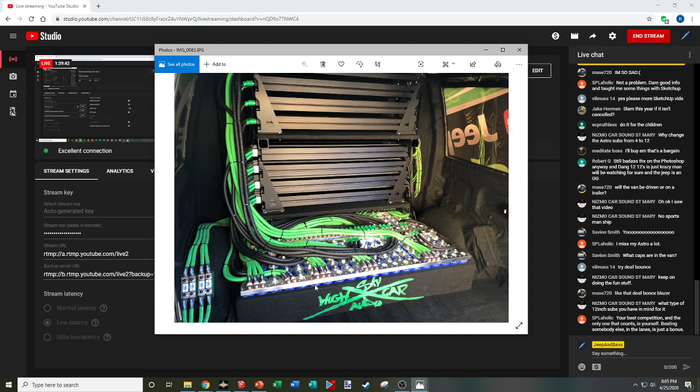But let's get back to a question or two. Someone asked what caps are in the van. These are the Maxwell 2.7 volt. They're in banks of 5, so we're basically on a 12 volt system.

If I had to go back and redo this, I would be on a 16 volt system, and we wouldn't be using the 10Ks. The DC 10K is designed for 12 volt systems, and it won't work on 16 volt. The DC 9K will. So I think we would have done that. We would have been able to get more power out of this, but we did pretty good,

and we're gonna just continue using this equipment in the demo build because we're not gonna need 80,000 watts, no matter what. So we'll be able to just run these amps really efficiently and not have to worry about getting every ounce of power out of them. So yeah, this is basically a 12 volt system. So what's the next question?

Try Deaf Bonce. Someone was saying Deaf Bonce. I think it was EXO or something. But anyway, I am sticking with my brands. I'm a loyalist when it comes to brands. I'm totally for Sky High Car Audio. I'm totally for DC Audio. I'm totally for JVF Customs. I'm totally for AD Designs. I don't move outside of my realm into different brands a lot.

Unless someone really came up to me and offered me some sort of sponsoring or whatever. That might be something that would sway me, but for the most part, I've had BT Audio approach me. I've had some others, and they all have really great product. But I have reasons to be with the brands I'm with because number one, West Coast, we don't have a lot of the big brands out here other than DC and Sky High. So product availability is best.

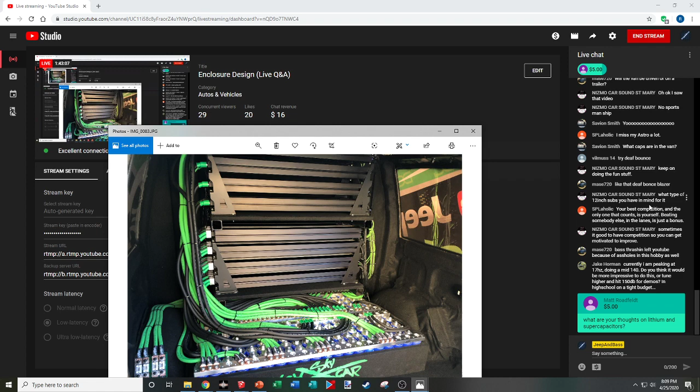What kind of 12-inch subs? I think for the Astro we're gonna do the XLs, the DC XL 12s. Those are nice middle of the road, 2,000 watts RMS per. If you got 12 of them, that's about 20,000 watts RMS, and obviously we'll overpower them a little bit, but we'll keep the knobs down a little bit until we need to, and it should be fun. So it should be a nice loud woofer to put in that wall.